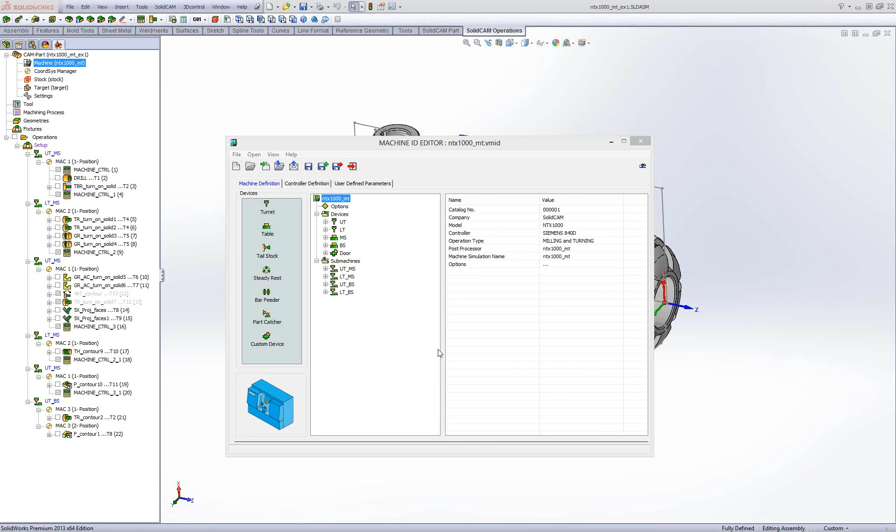In the previous part of the Mill-Turn webinar, we talked about new operations and CAM-part settings, CAM-part definition with target and stock. Today we will talk about options in Machine ID, how to define and how to use them in machine control operation.

We have general options for the machine, and all the things that can exist on the controllers, like machine stop, optional stop, machine power, lights, door, coolants.

Everything can be set up here. I will define for this machine: machine stop on, optional stop, and transfer mode - yes, I need to define it because we have two tables - and one coolant, let's say bed rinsing, the shower.

Now for the upper turret, I will define only rotation and axis synchronization, spindle orientation also. It can be a value.

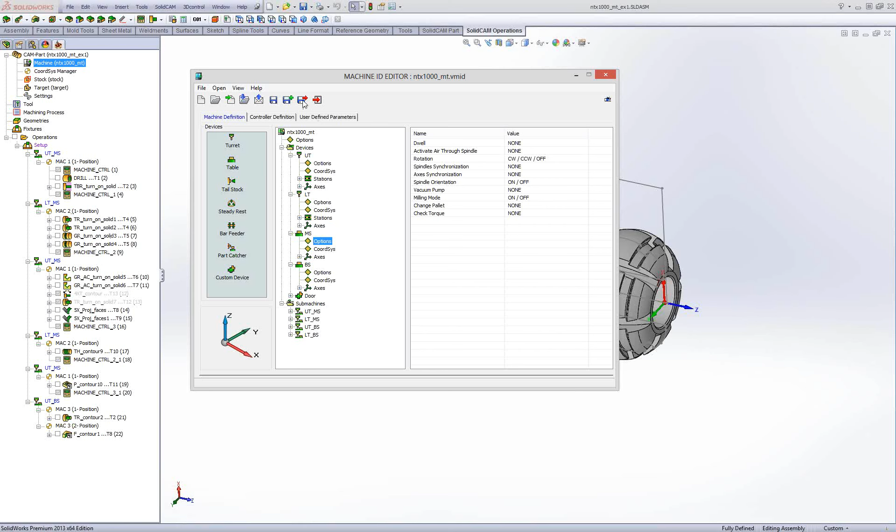Save and exit. Let's go to this part and delete all the operations. I have a backup.

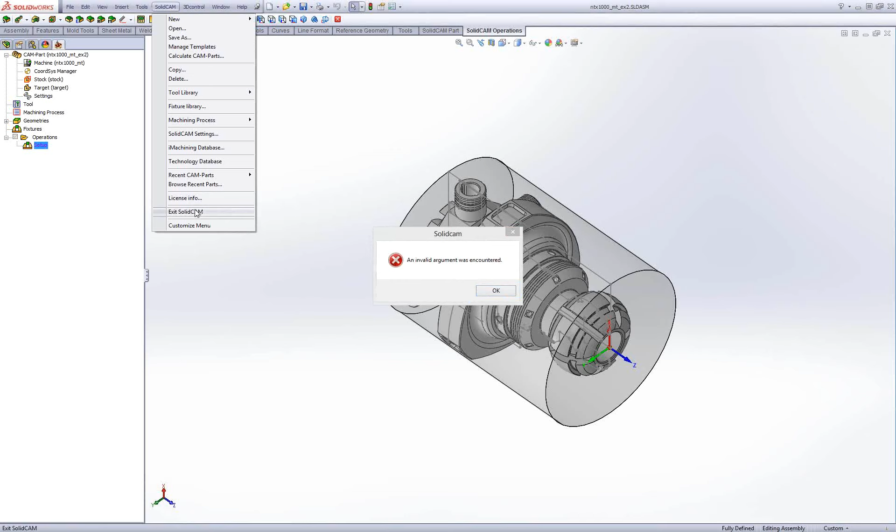Let's open the backup and see what's happened. Okay, the part was saved.

New machine control. As I defined in Machine ID options for machine, I can operate them when I drag this item named machine here.

I defined that I can operate the machine stop - I have it here - also the optional stop, and bed rinsing.

On and off, I can operate and shut it down. Transfer mode - the machine entering transfer mode.

For example, in the Mazak Integrex machine, we have some M code, 548 I think, if I'm not wrong. And those options are for the machine.

Now, in the same way, I can define for the upper turret device. I define the rotation, so I can operate the spindle, rotate the tool clockwise with 3000 RPM.

The machine we're talking about is the NTX. What we need to do is send the upper turret to a safe place, send the lower turret to a safe place, and prepare the back spindle with axis B3 on 0 degrees, open the chuck, clamping, go, catch the part, unclamp the main spindle, clamp the back spindle, unclamp the main spindle, and retract.

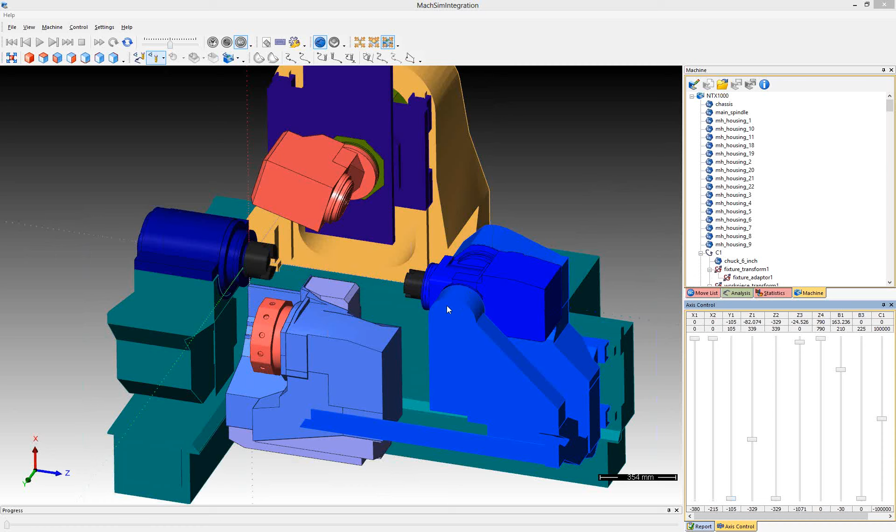Now, this transfer can be done in two modes: milling mode or turning mode. That means with the tables, with the chuck joined to the fourth axis, or in turning mode when I can transfer the part while the spindle is rotating. We will do both now.

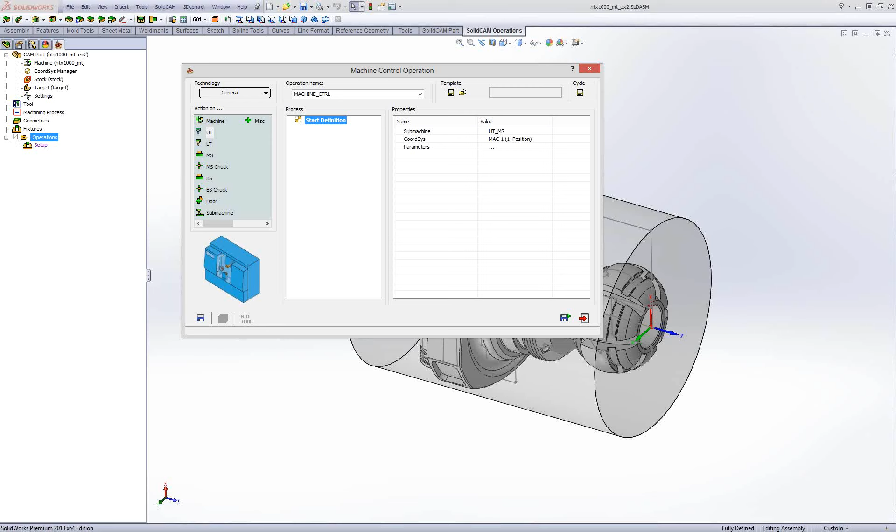Upper turret - let's send the upper turret to a safe place. If I have some operations before and need to shut down the rotation, I will shut down the rotation, and spin off, and movement.

I prefer to work with the machine coordinate system to send it to known limits. So X will go to 0 position with rapid, and Y also to 0, Z also, and B to 0 position.

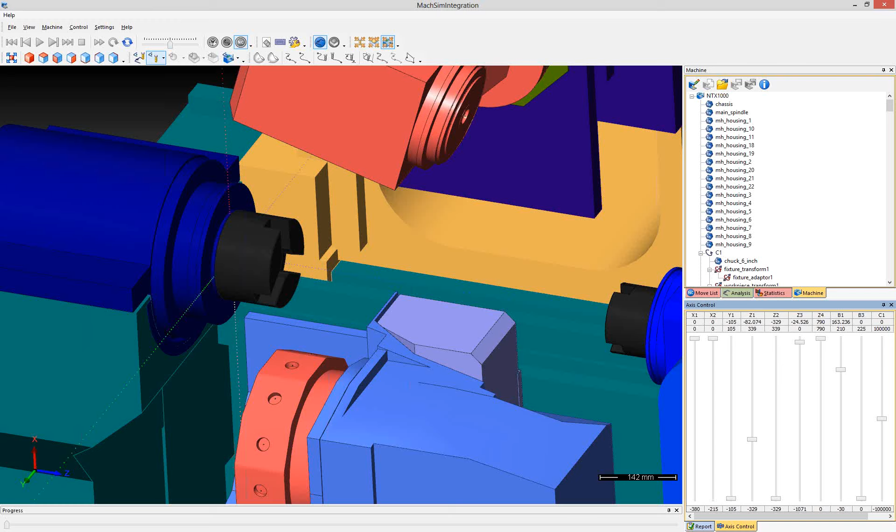Lower turret - also, if there's a rotation from an operation before and the tool is spinning, we will shut it down. Movement for X, retract X to home with rapid, and also for Z. But let's look at the machine simulation.

Where is the best place to send the lower turret? I send the lower turret to 0. I'm going to make the retract.

But for Z, Z2, here is the 0 point. I want to send this lower turret here to the left side, to the left limit of the Z-axis. So here the value is minus 329, for example.

Now let's see what is the best place for the upper turret. For the upper turret, yes, it's X maximum retraction, and Z with B1 on 0 degrees.

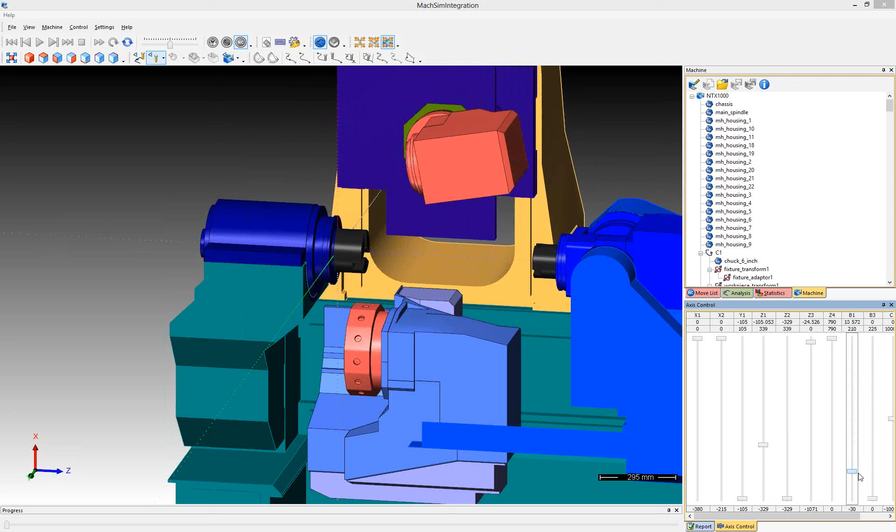I can go with Z also to 329.

Upper turret movement, and also Y-axis. If I want to be more careful, you see the 0 position is here in the middle. Here it's going to plus 105. I want to send it to minus 105.

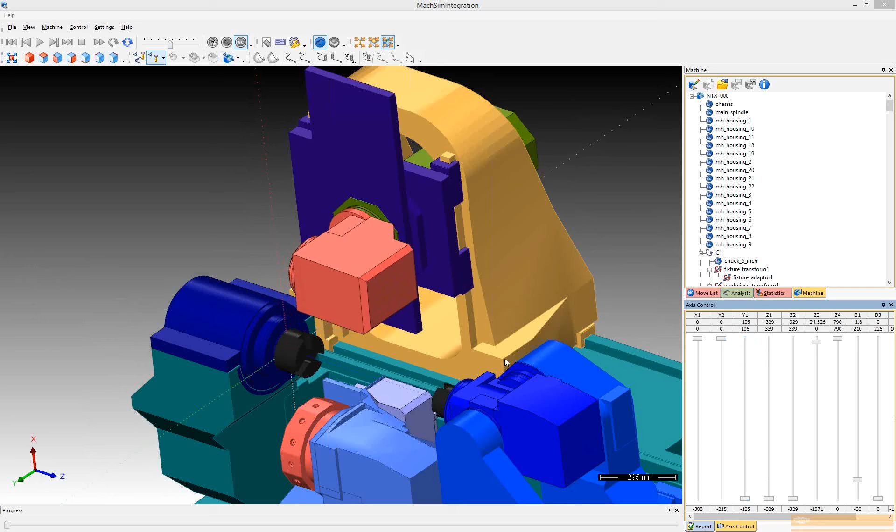And minus. Save. Now I send the turrets to safe position. Now I need to prepare my tables.

Main spindle, if I have a rotation before, shut it down, spin off, and we will define first a milling transfer with 4 axes joined. Milling mode on. Back spindle, also milling mode on.

And I make sure that B3 axis is on 0. Here I will already open the chuck on back spindle, clamp open. Also for main spindle, there are machines that when you send a command join the C-axis, you're entering in the milling mode. Also the C-axis is moving to 0 position. But if not, you can send it to 0.

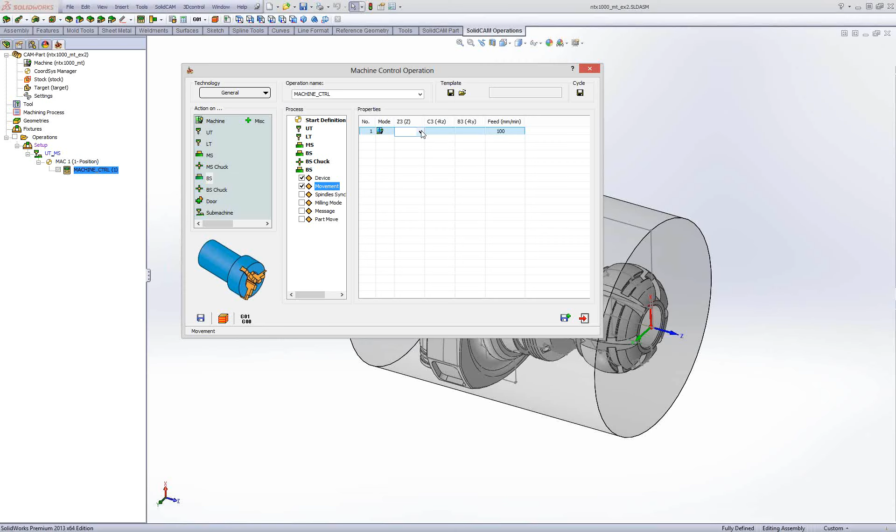Movement. And with Z3 I will select this option.

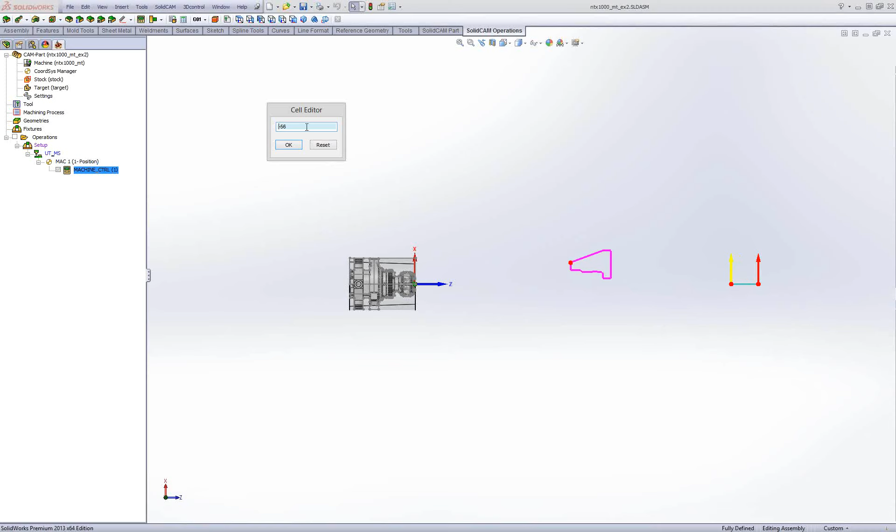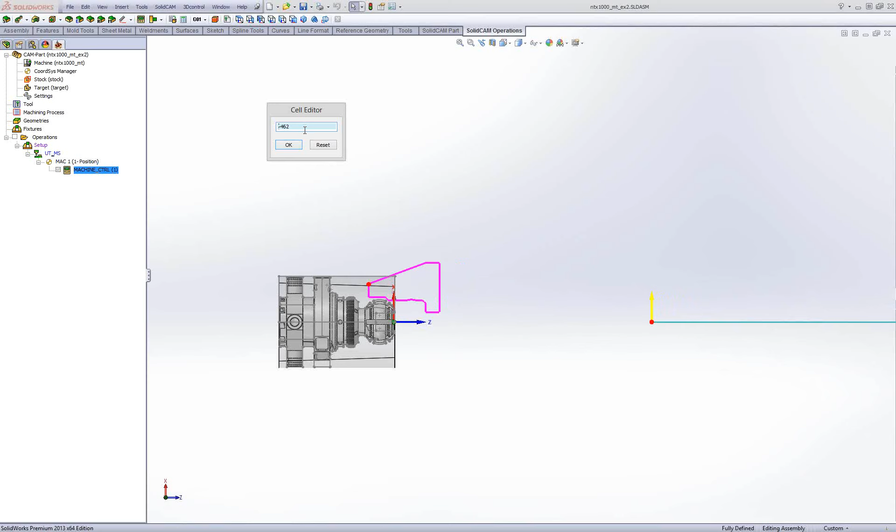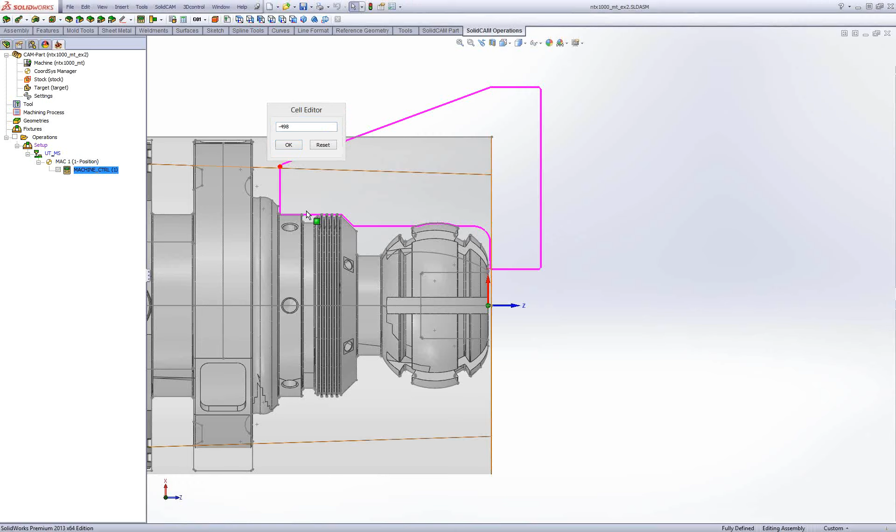With the mouse wheel you can move the back spindle. Now the steps are 1 millimeter. If you use control, the steps going to 100. And if we use control and shift combination, the steps is 0.1 millimeter. In this way you can be very precise to bring the back spindle into the right place, correct place.

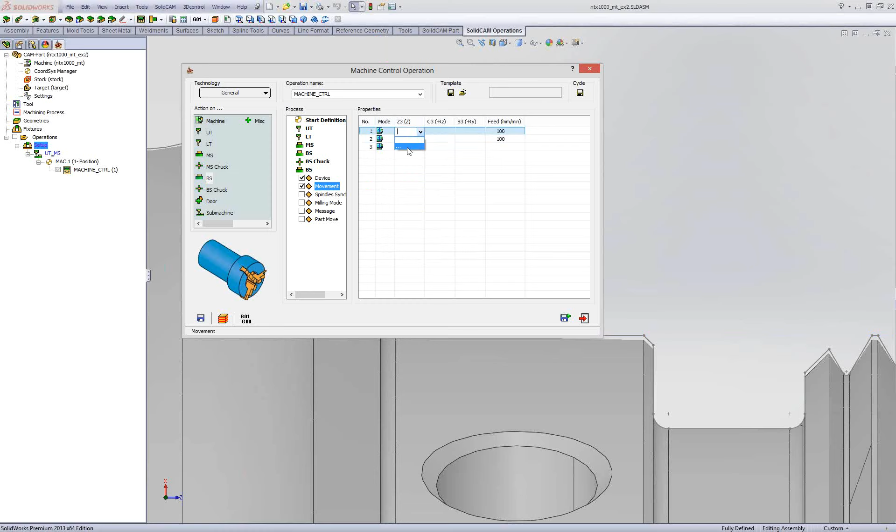This is the value which I can divide this movement in two parts. For example, let's add one. I will add new movement for rapid, to -400, and to this position with 200 millimeters per minute.

Now in this position I need to close the chuck. Back spindle, clamp, close. And main spindle chuck, open.

Back spindle. Now I will use part move, not movement, because movement is moving only my device. I will use part move because now the device with part will be moved in simulation. It can be also the first movement with feed.

Let's say get last location. I was here. I don't need it. This movement go to -400 with feed and go to 0 position with rapid.

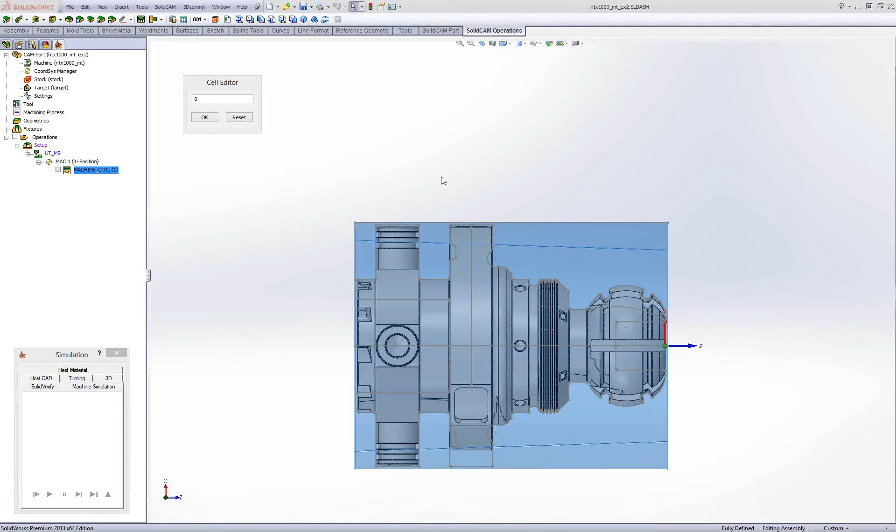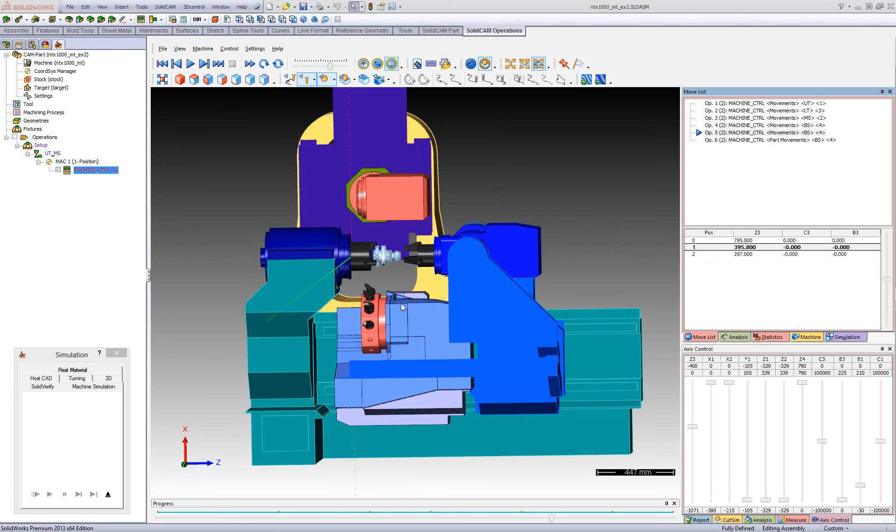Let's see what we have until now in machine simulation. We'll hide the stock. Upper turret is going to safe position, retract. Now the lower turret and back spindle is going with rapid to clearance.

-400 millimeters we define the first movement, and with feed to catch part position. Now the chuck will be closed for back spindle and open for main spindle. Those are our commands and code, send it to machine. For now we don't see it in machine simulation.

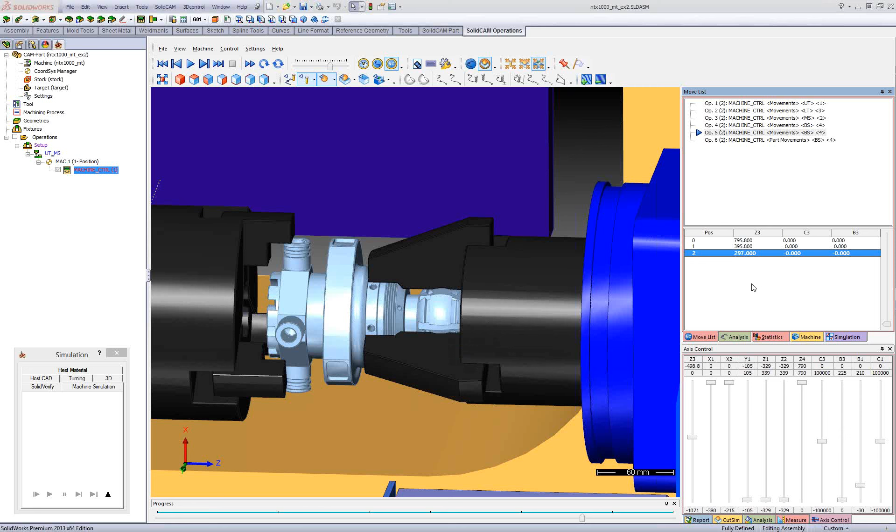And the next movement should be go to minus 400 with feed and go to 0 position. So the transfer is done.

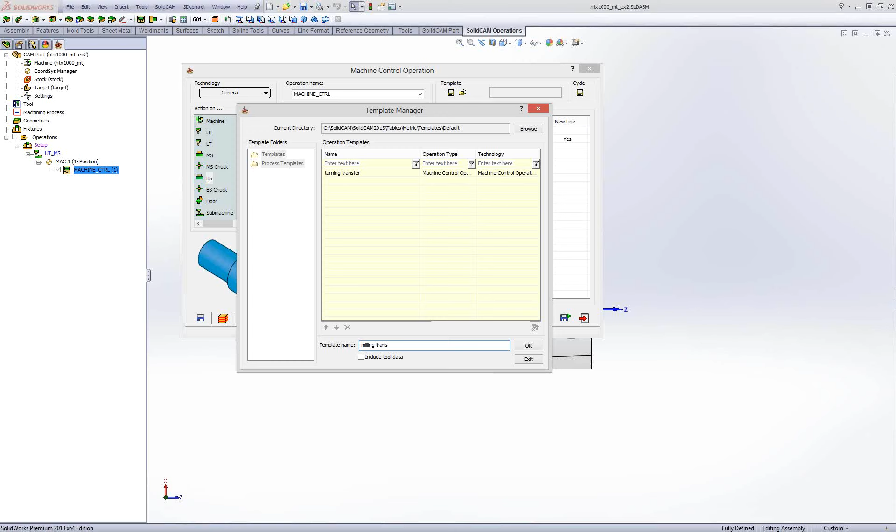This can be saved after you define a process like this. You can save it as a template. This is a milling transfer. And every time you want to use it, add the operation from template, milling transfer, OK. Just select the coordinate system and the submachine. You have the operation, the entire operation.

Now, what more can we do to make it more automatic? All movements that we define, for example, retraction of upper turret to a safe position, we can define them as parametric. So, for example, the X position will be 0 for me all the time. I don't want to make it parametric. Y also, this position is stable for me, and I want to make this Z position parametric in order to change it very easily, easy and fast.

So this position, I want to make it parametric. Right click on that, add parameter. Let's say upper turret Z, safe point.

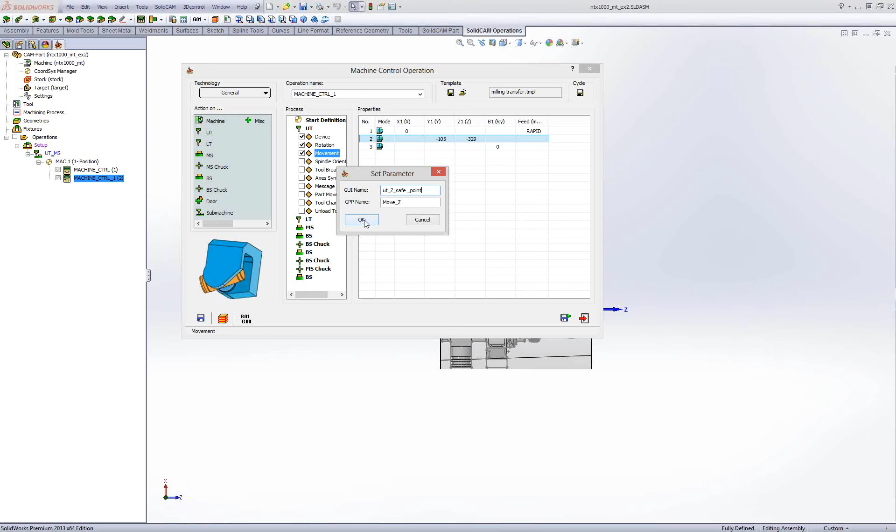For lower turret, the same movement Z. I want to define this point parametric. Lower turret Z, safe point.

What else? I want the position of chucks for a fixture. Maybe I want to transfer the part when the main spindle is on 0 degrees, the axis is on 0 degrees, but I want to catch it when the back spindle is on 30 degrees or any other angle, as maybe I have something on the part that it's not allowed to me to catch it in 0 degrees. So also this movement of C3 can make it parametric. Any of them, any value here, you can make it parametric.

I will make just what I think I need to change. Okay, I will leave the names as they are, only for the example. And for back spindle movement, C-axis also add parameter. Back spindle movement, here also 2 points that I want will be changed from part to part. You have different parts, you will have different points where the back spindle will come and catch the part. Add parameter.

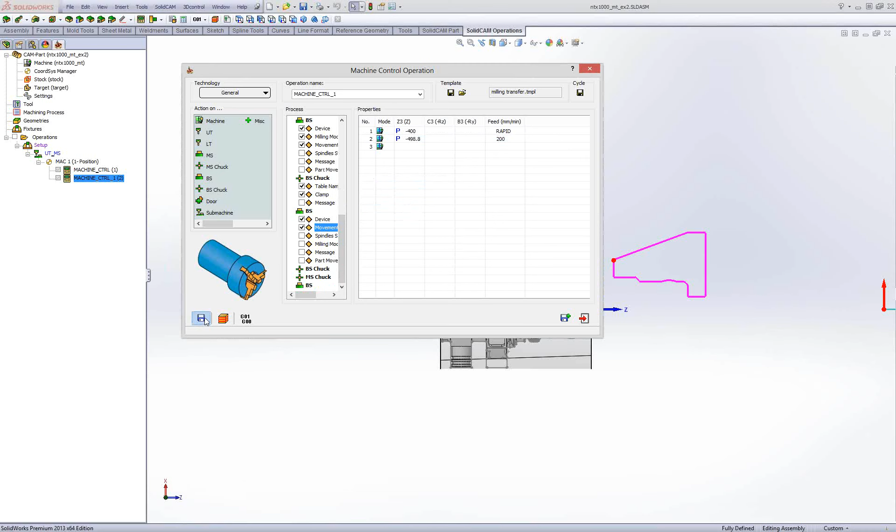And also add parameter, make it free. Let's say that's all for now, just for this example. Save, and I will save it again. Overwrite the old milling transfer.

Yes, replace it. Now let's exit, save and exit, delete. Next time I want to use this template, add operation from template, milling transfer.

I only go here to define parameters and change them. Upper Z safe point, I want to change it, okay or not. For lower turret, C-axis for main spindle, C-axis for back spindle, and the catch position where the back spindle is coming to catch the part.

Those 2 points, the same, I can define the feed, I can define everything. Any other value can be defined parametric. And you don't need to go and search where this device is doing this movement, you have the parameters here, change them very quickly and easy. And you have another transfer

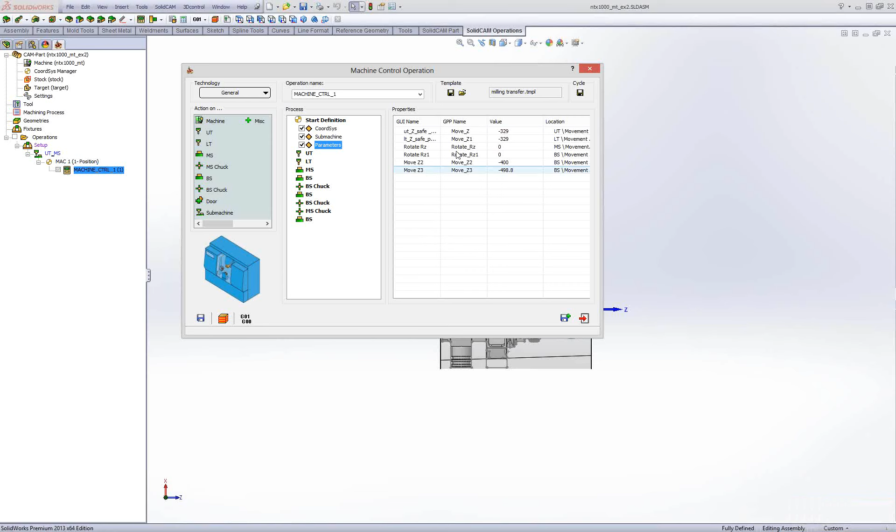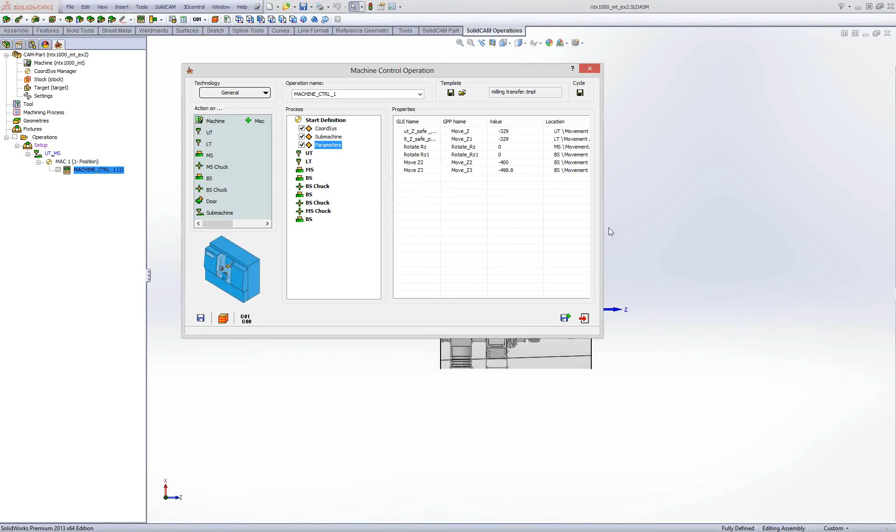process. Now, the second option to save this is as a cycle. Let's save it as a cycle. I'm also changing the name, milling transfer. Yes. Delete.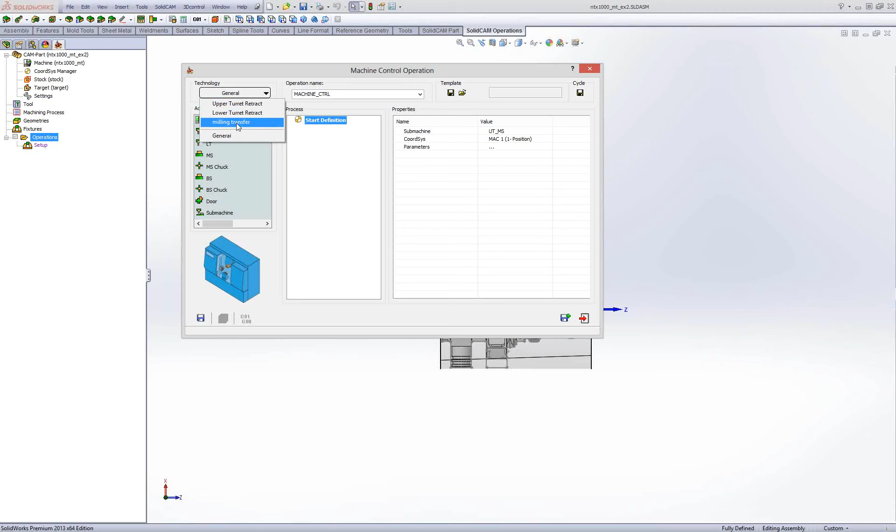Now, if I want to use the cycle, add a machine control, and the defined cycle that we already saved, you will get it here in this menu. I already have defined it before, a retract for upper turret, a retract for lower, and now we define together a cycle for milling transfer.

It's very simple to use. All the commands are inside, save it, you see only the parameters. Change any parameter, you have the milling cycle process ready.

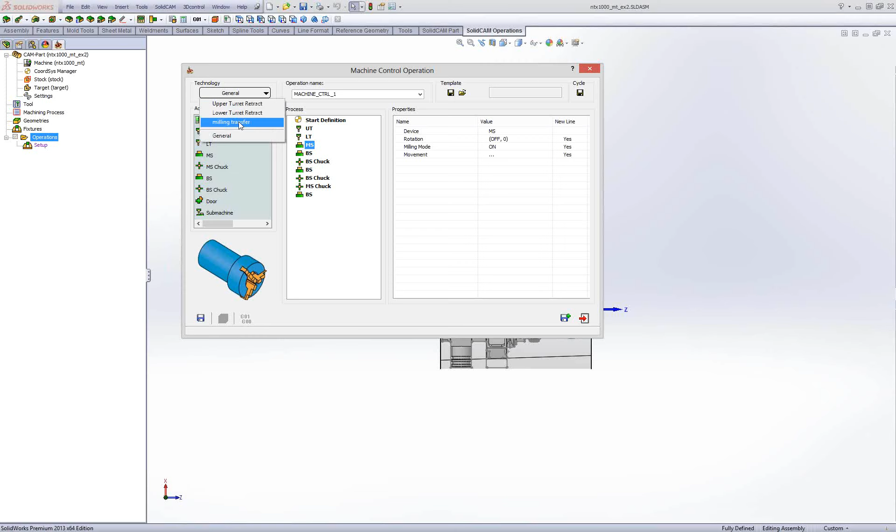You want to change something, go to General, you will get all devices with movements, with options here, and you can change it. But if you want to use only the cycle, ready cycle, and change the parameters, it's very easy to use for the user.

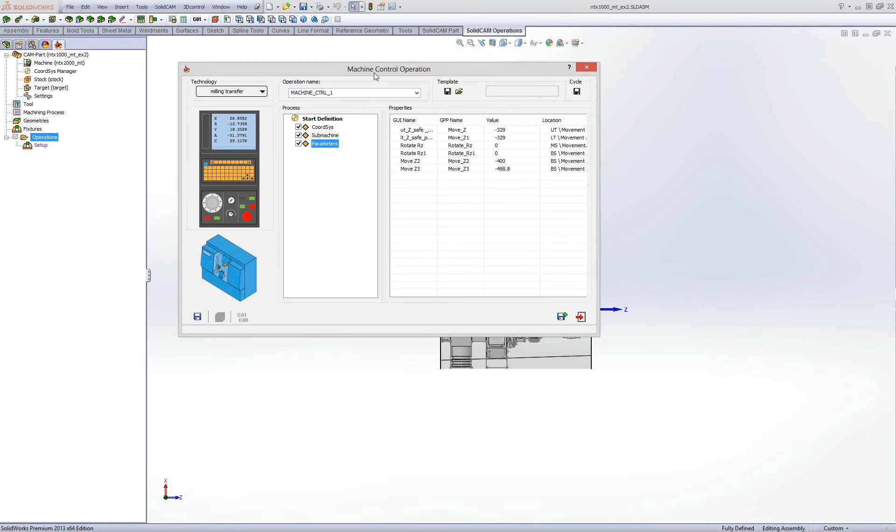Okay, so this is machine control usage. We can use this machine control. Without the machine control, we cannot have control on the complex mill turn machines today. Multiple turrets and multiple tables and a lot of options that we need to operate, shut down and control. This is the tool.

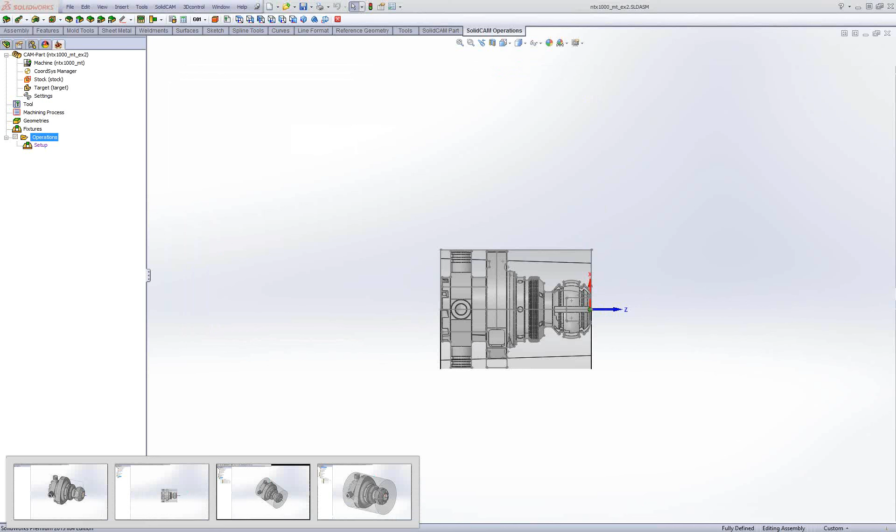Want to exit? Yes. Now, last time we talked a little about the synchronization. In a machine with upper and lower turret, with at least 2 turrets, we need to synchronize the operations.

Turret synchronization. SolidCAM has an option in SolidCAM settings that we can synchronize automatic operations by CAM-tree order. So as I defined operations, they are already synchronized in this turret synchronization interface automatically. If I don't want to be synchronized automatically, I can disable this option. Settings, turret synchronization, auto synchronization as in CAM-tree order.

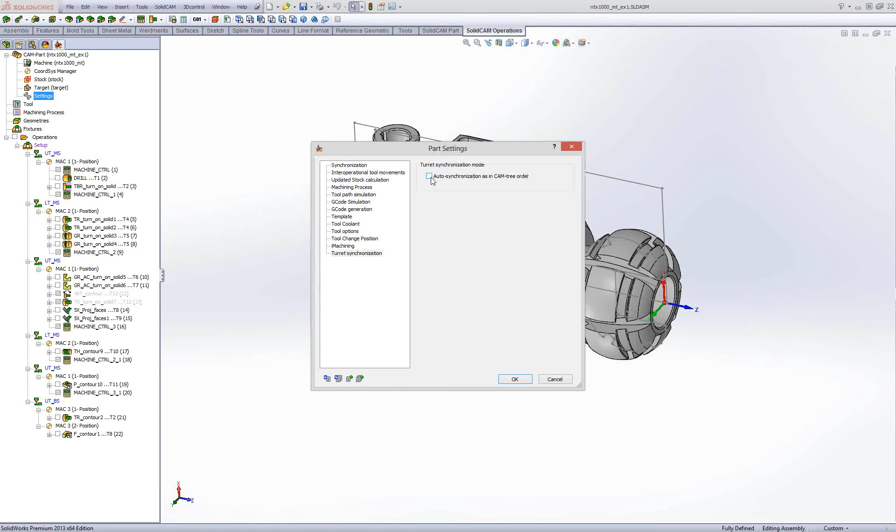So maybe the user wants to synchronize them. Let's delete the old synchronization, and the user wants to define his own synchronization. For this we have these buttons: synchronize selected operation start to start, start to end, end to end, and all operation as in a manager order.

So let's take for example this operation number 11 from the upper turret channel to start together with operation number 5 from the lower turret channel. I will select start to start. They are synchronized. I can make them end to end.

Delete all. So I will get synchronization points in G-code at the end of the operation, 11 on upper turret channel and after operation number 5 on lower turret. But you see here one thing, I can delete all the synchronization, but the balance graph remains synchronized.

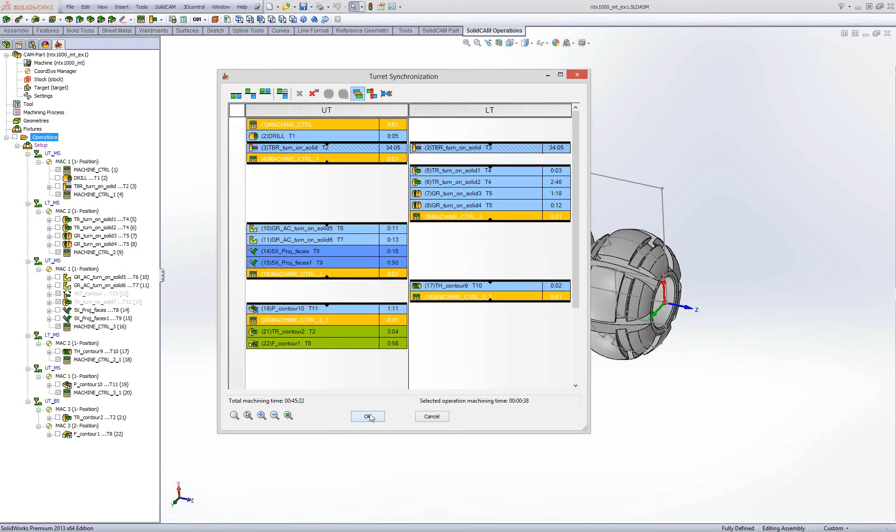Balance graph cannot be deleted. The synchronization of balance graphing operation cannot be deleted. This operation is working together in any situation. It's not in our control here, it's automatically done, and we cannot change this synchronization. Let's synchronize them again by the CAM-tree. This is about turret synchronization.

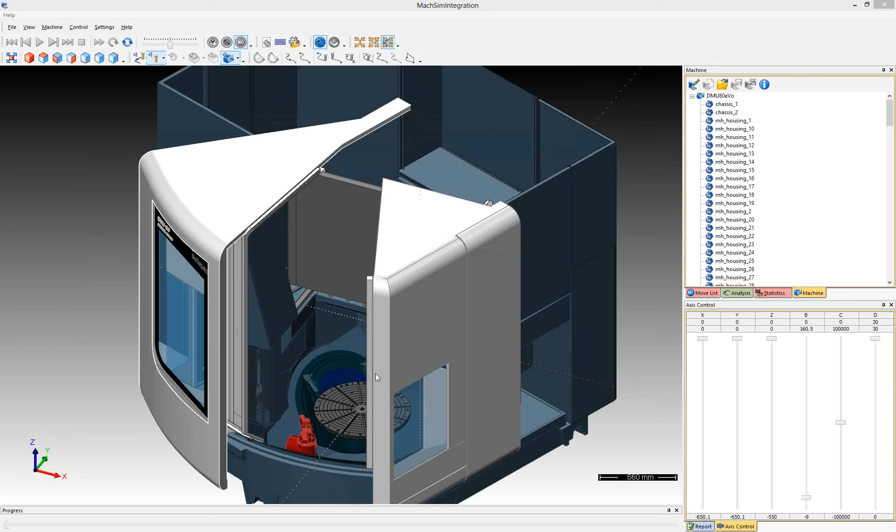Now last time, okay, I remember. Another option, I want to close this machine simulation and open another machine. DMU 80 mill turn. This is a milling machine that can also turn up to 900 RPM on the table.

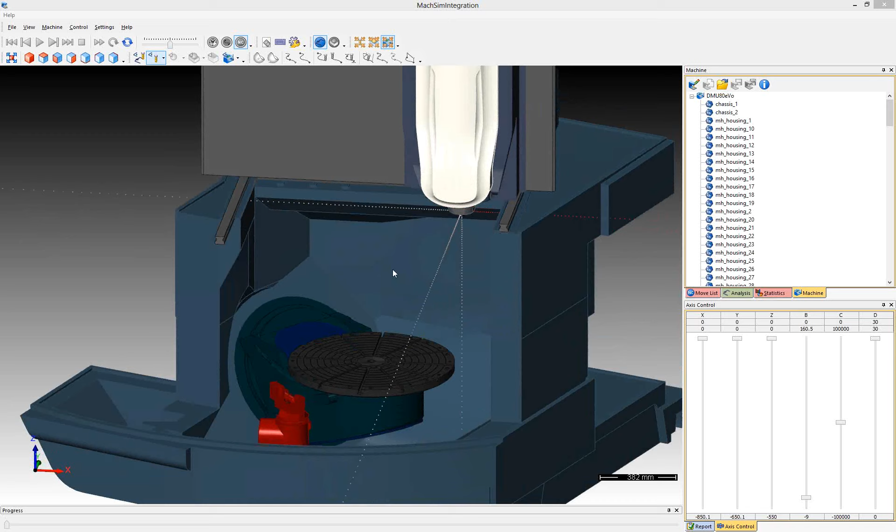And for this type of machine, that is a milling machine but with option to turn, table kinematic type, we can use it when we have a turning operation on face, like this. I have a face operation and turning. Today I have the option to rotate this operation around the tool axis.

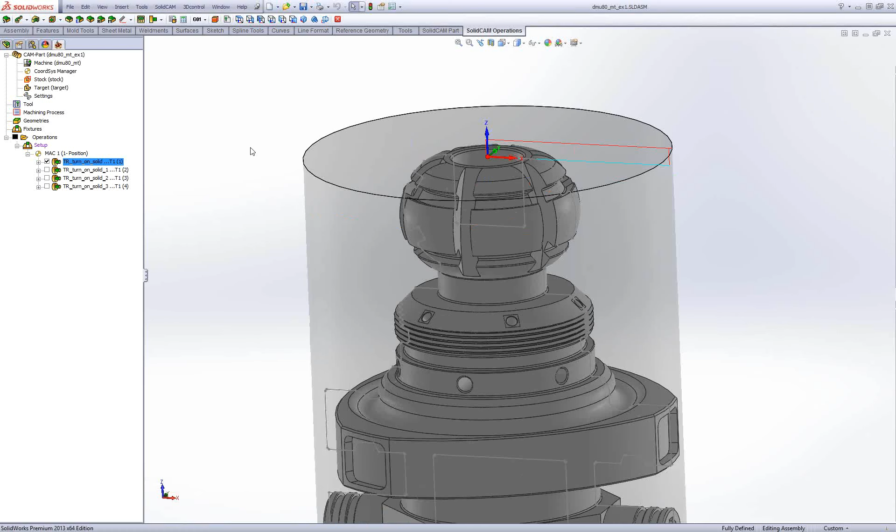You can see here another field, a new field, spindle orientation. That means the tool will be rotated around its own axis. I can make turning not only in the ZX plane, I will rotate the ZX plane. It's an option on the machine.

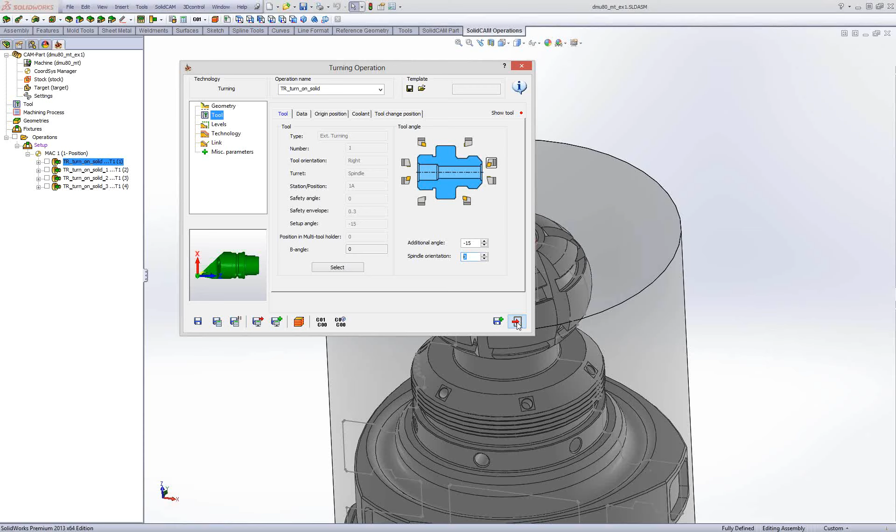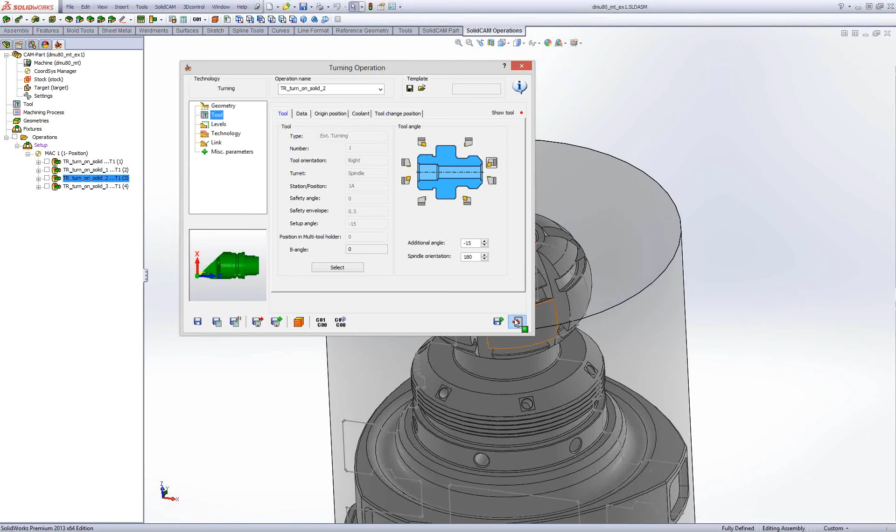There are several reasons, not important. The important thing is that we need to support this option that exists in the machine in SolidCAM. So we did it. Now, the first operation is in 0 degrees, the second I define in 90 degrees spindle orientation, third and fourth operation in 180 degrees and 270 degrees. Let's see the simulation, it will be more clear for you.

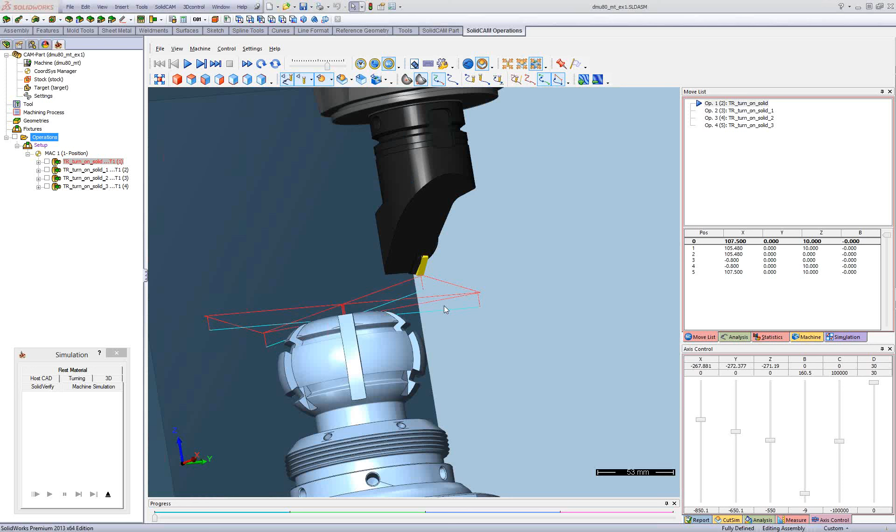Now, toolpath also. We have a tool with insert only and STL holder also defined. This is the first operation on 0 degrees, it's turning on the ZX plane.

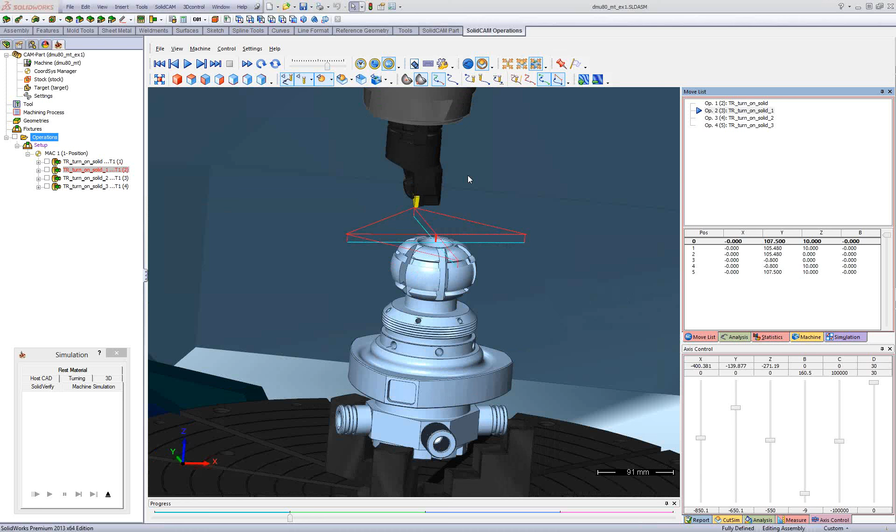Now the second operation is rotated 90 degrees around the tool axis. You see also the tool is rotating with the spindle orientation option. And the third on 180 degrees. I can do it every degree, from 0 to 360 degrees, in any angle that I need.

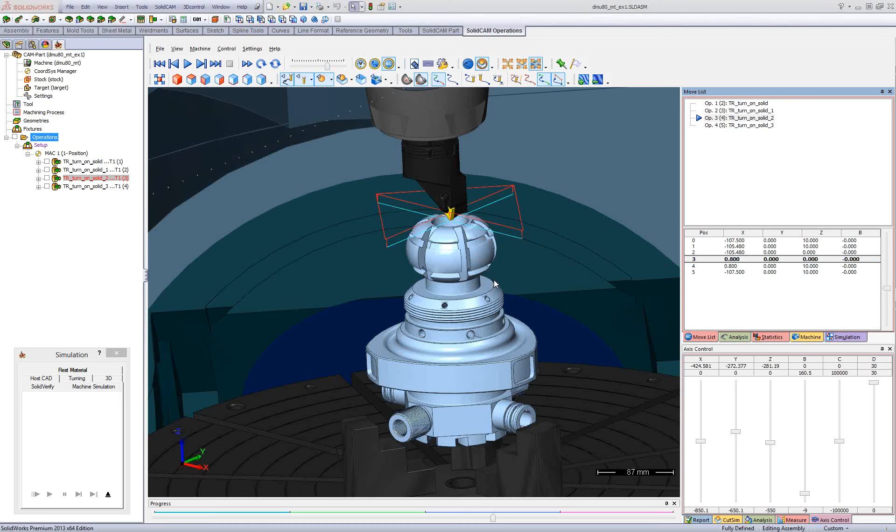I heard about reasons that maybe you have the coolant tubes from this side, and the tool gets better cooling if you work on this side. Yes, maybe the chips will fly in a better way, not to be deposited on the table. The reasons are many and not important. Important for us as SolidCAM is that we can support this function to turn around the tool axis when the table is on 0 degrees position, because if the table is rotated, this function is automatically disabled.

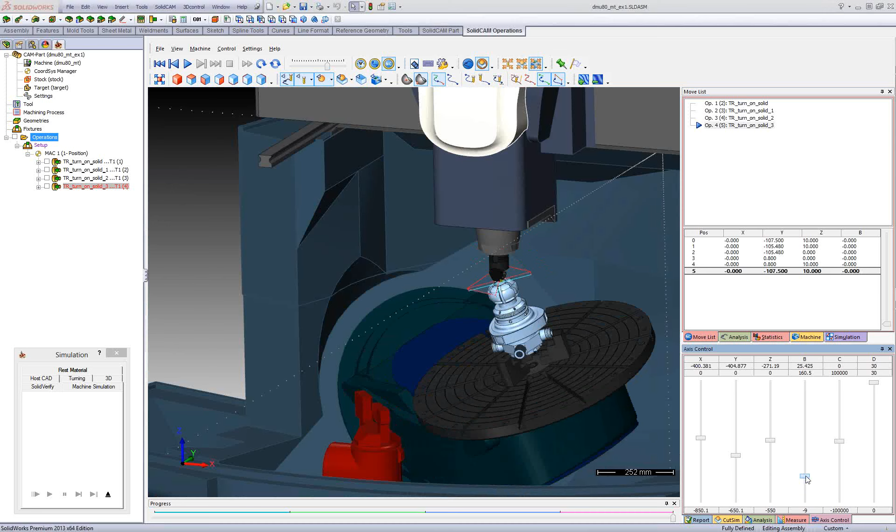Here you can see 1 degree. When the B angle is moved 1 degree, the spindle orientation is also disabled. Only when the table is on 0 degrees is the spindle orientation available. At 1 degree plus or 1 degree minus, the spindle orientation is disabled.

So this is the new functionality that we added for table mill-turn machines. It's also working on the Hermle MT, I think C42. We have a machine, and there are many others. Okuma MV500, I think they have the same table kinematics with turning possibility.

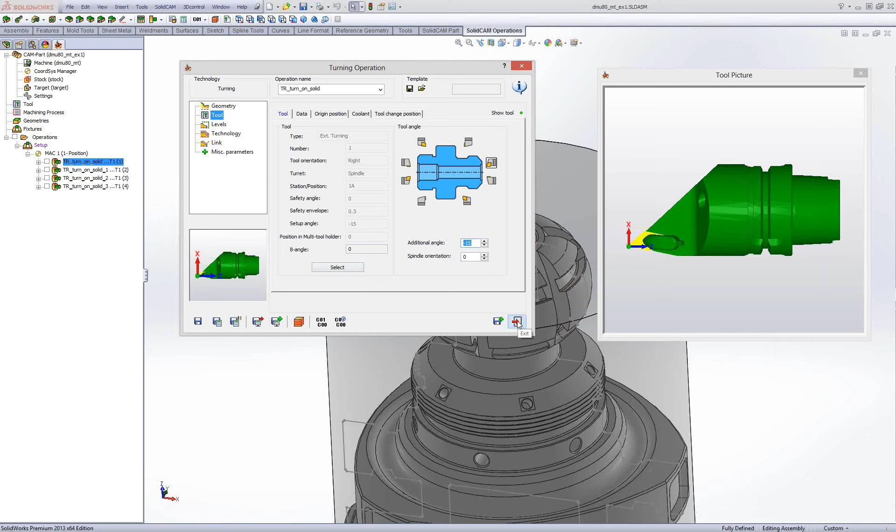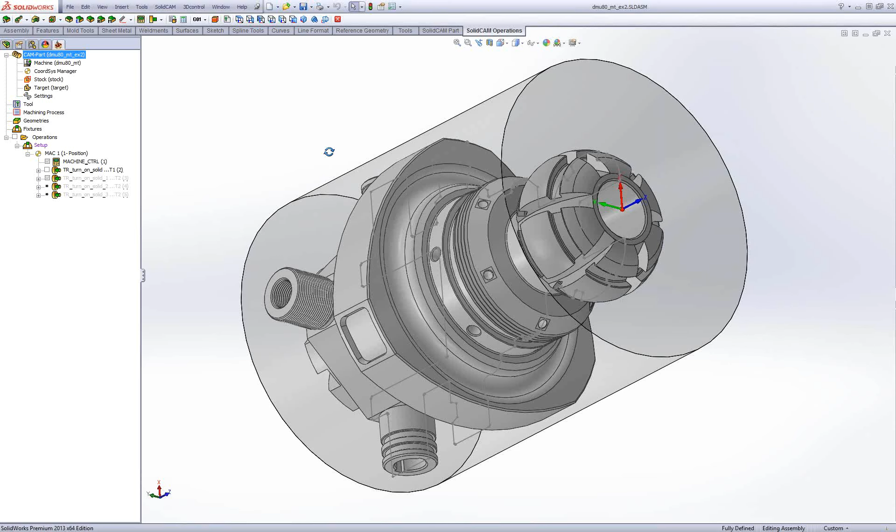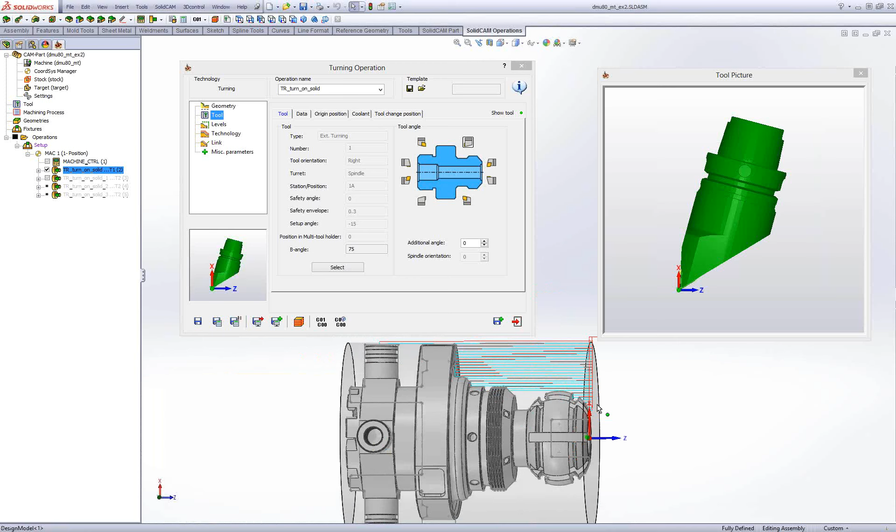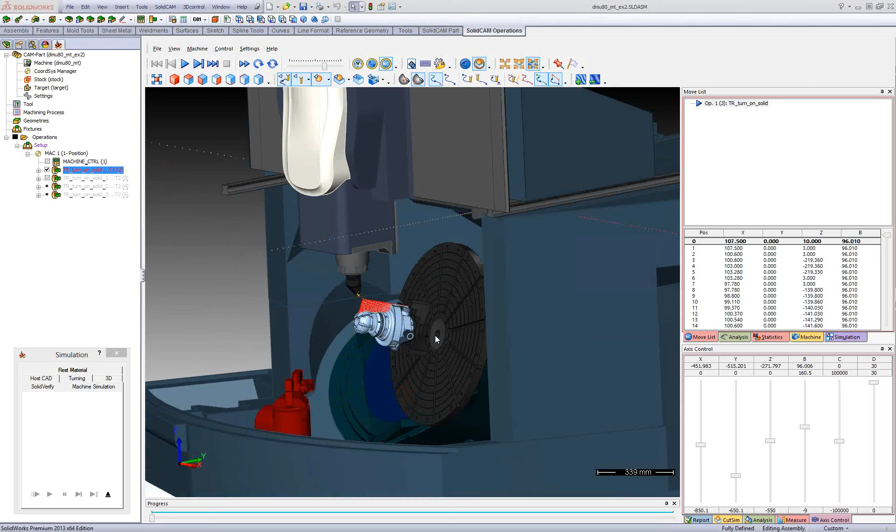Now another function, another thing that I want to show you, is the possibility of working with the B angle in a different angle than 0. This is the toolpath. So the simulation, the machine simulation. The table is rotated because the vector of the B axis is at 45 degrees.

This B angle is calculated, it's not what you see in the operation. In operation it's the angle of the tool around the y-axis, a virtual y-axis, but here in this kinematic we calculate the real B angle.

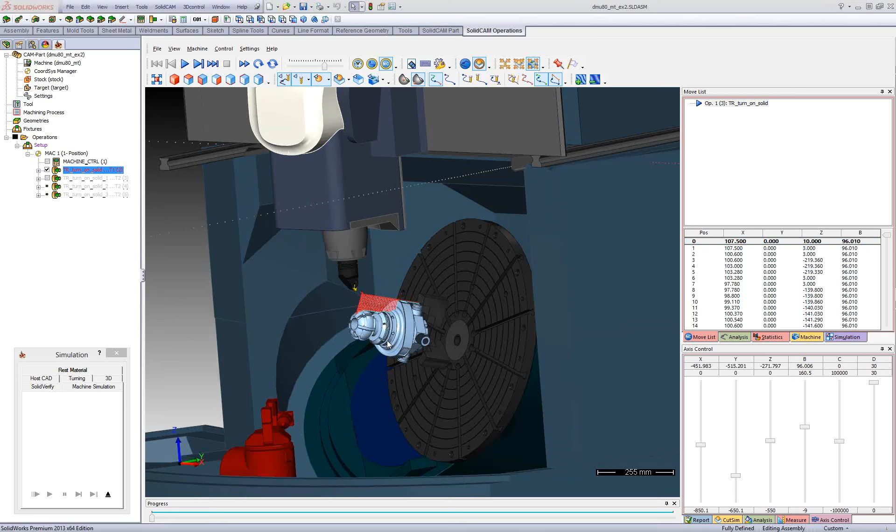I also have tailstock. Another option is using a removable device. So I built for this machine simulation two XMLs, one with a tailstock. We have a manual tailstock that we can mount on this machine. And I made an external program, a batch file command. Tailstock is mounted. Simulate.

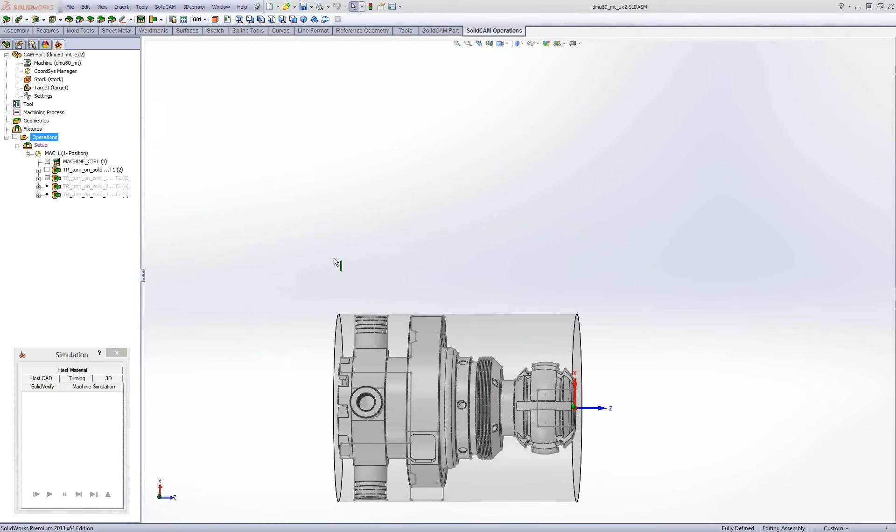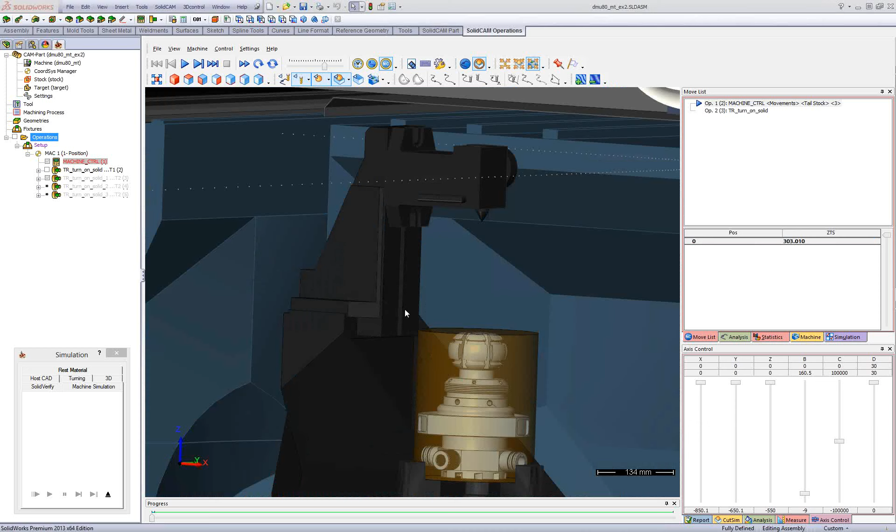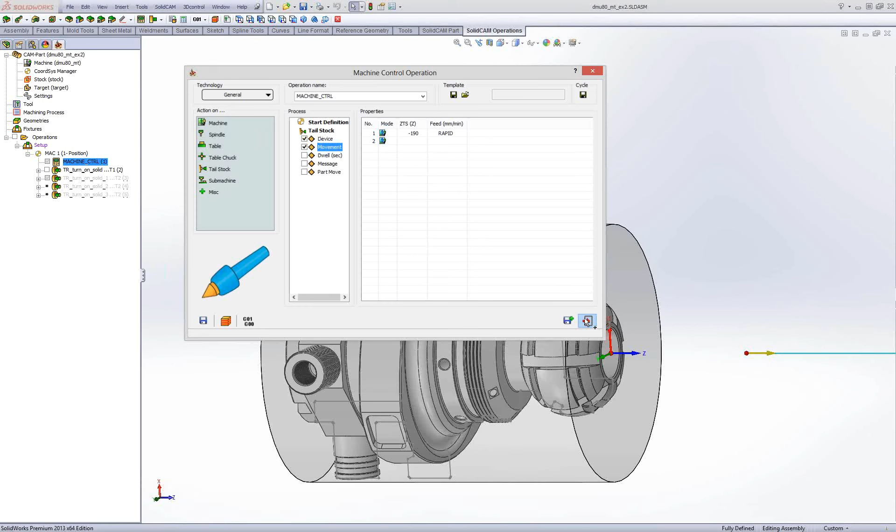Now you can see this tailstock can be mounted by the operator on the table, and this is also manually moved to the position by the user. But I also can, let's see what I did here, tailstock movement, minus 190, save. I define an axis for this tailstock. And the first movement will be to support the part, and after that the operation will start.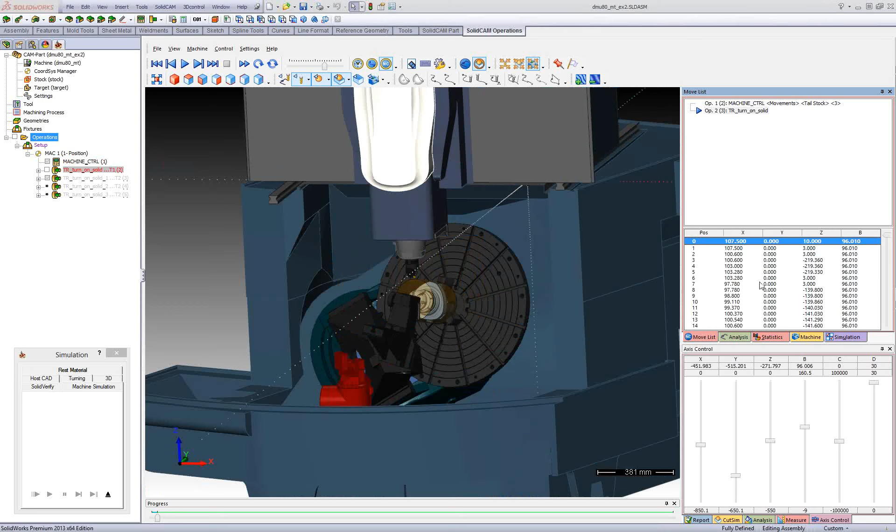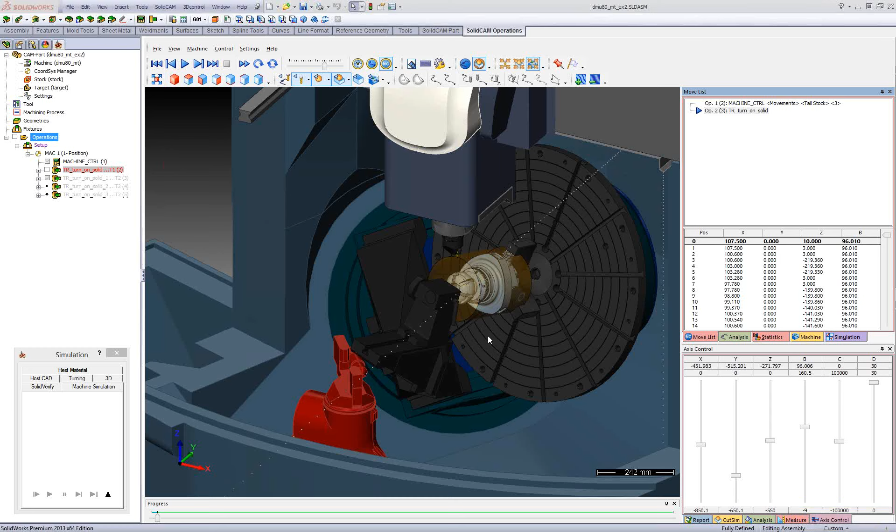The tailstock can be used. So when you have removable devices that the user can mount and unmount on the machine, we have this solution to make two XML files for machine simulation in the same folder, and with a batch file use the XML with the tailstock and use the XML without the tailstock. Right click, external program, tailstock is unmounted. Now the next simulation will be without the tailstock.

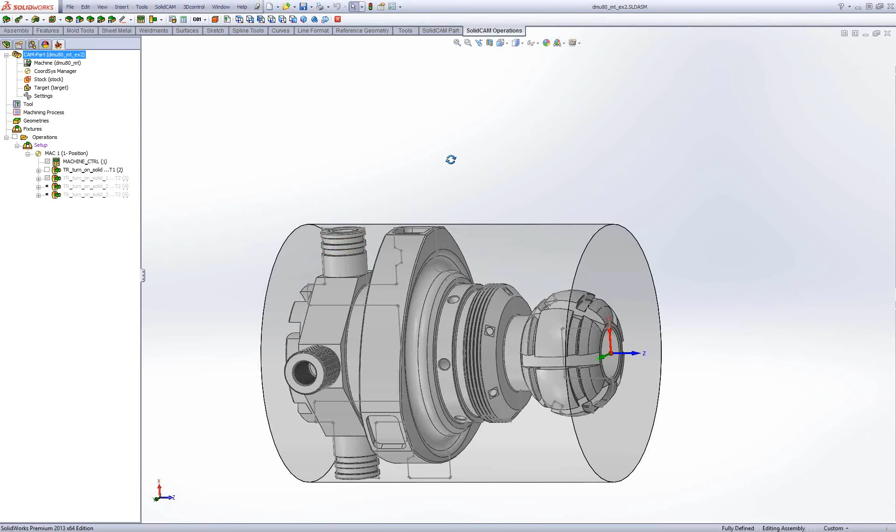We finish for today. We covered the VMID, turret synchronization using MCO, and the new table options on the Mill-Turn. That's all. If you have questions, I am ready to answer.

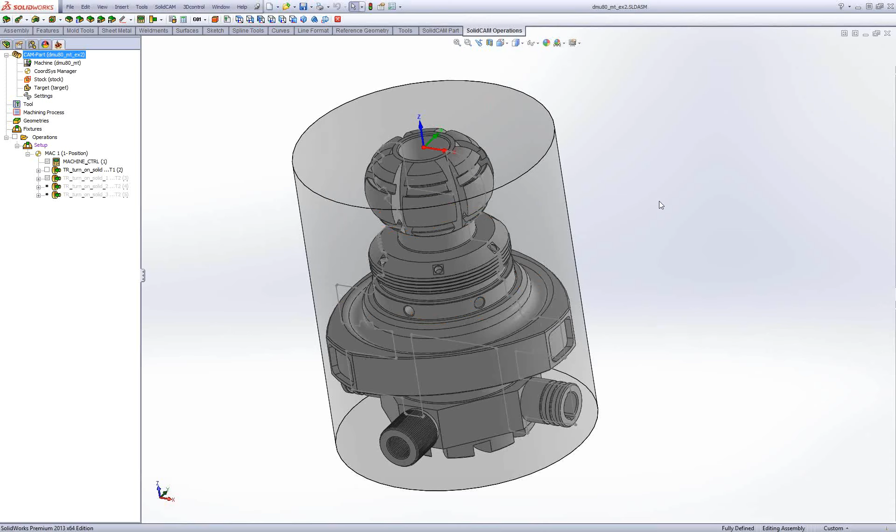I also want to announce that we will start development for a Swiss type machine very soon. Maybe in one year we can have the first version supporting Swiss type machines, but we'll start the development very soon.

Where can I see the questions? David, are you here? I don't have control of the questions. If you see the questions, can you read them for me? David? I think he's not at the computer. I will call him.

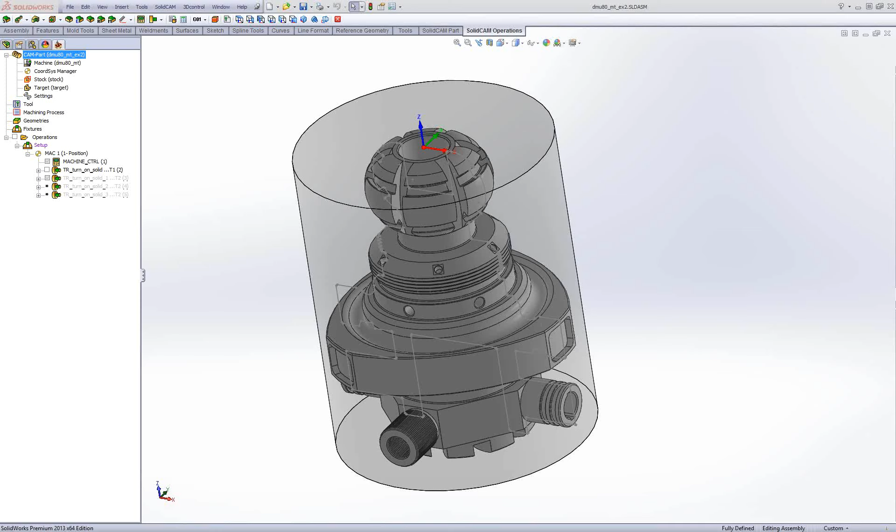Okay, I see a question here. How do you know the back spindle should move to 499.8 to get the part? Why not 0.5 or something else? Let's go back to NC, add machine control, and select milling transfer. Make it general. We're talking about back spindle movement here.

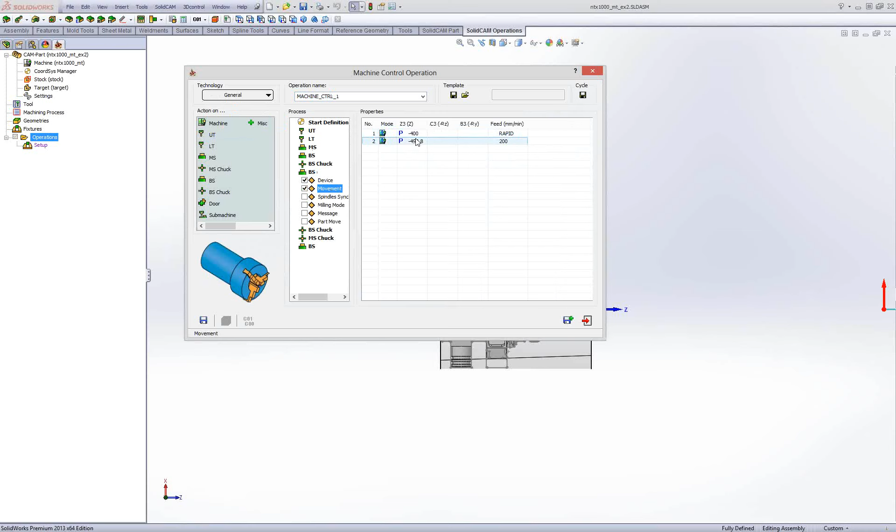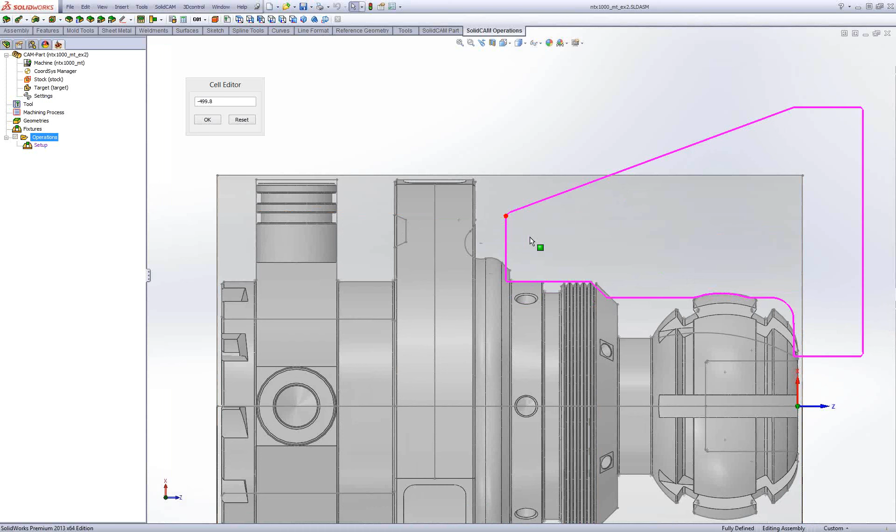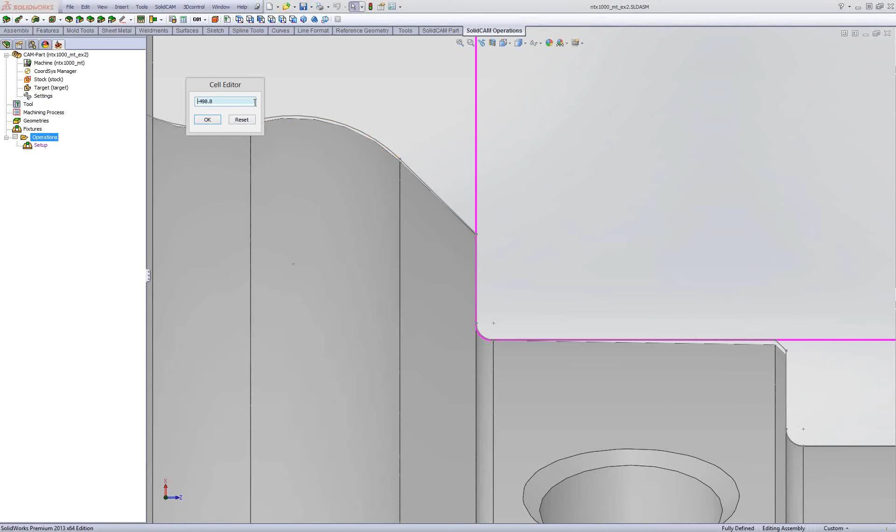I can zoom in. You see, we have the fixture that we defined in the setup. We have this drawing here, this is the fixture, yes, these are our jaws for the back spindle. So using Control Shift, I can step down through the positions. You see, this is a very accurate movement. At point 8, I'm in the place I want to be. Point 7, you can already see it's not in the correct place. Point 9 is into the part. So how do I know? This is how I know. I can zoom in and make it more accurate using 0.001.

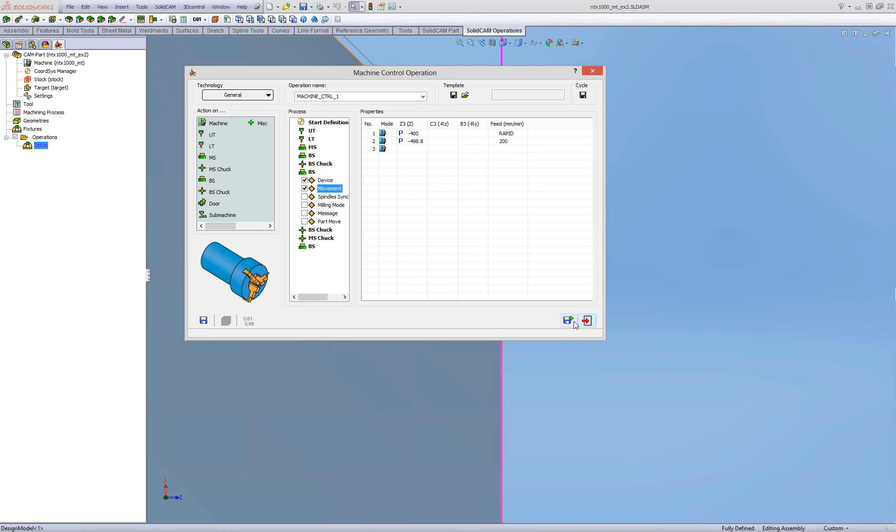But generally the user is going to do the setup on the machine, measure the exact position, and come to SolidCAM and just input the values here. Yes, this is the way the user works. But we can also, if you define the correct setup, yes, with the part placed correctly, depending on the sub-machines, those values are correct, and you can have very accurate values in transfer.

If we don't have any other question, and I don't see any other questions, so we finished today. I thank you very much for your participation.